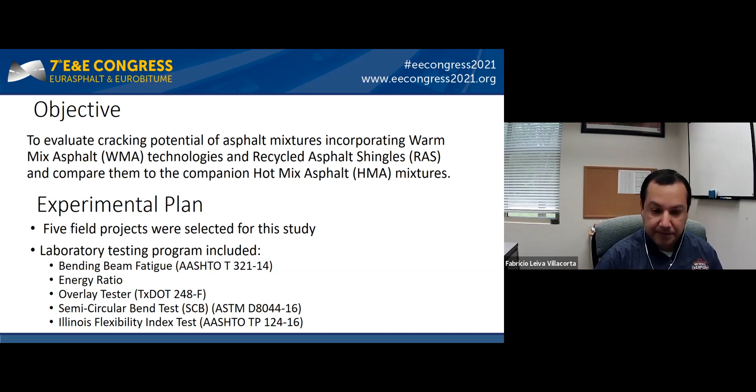Here I'm showing the 5 projects selected at different states: one in Wisconsin, the other in Alabama, Tennessee, North Carolina, and Indiana. We have a variety of technologies, 3 additive technologies and 2 foaming technologies. We also have a variety of virgin binders ranging from 58-28 all the way up to 67-22. We have different sources of aggregate and sizes ranging from 9.5 millimeter to 12.5 millimeter.

Pretty much all the mixes in the United States have RAP, reclaimed asphalt pavement. The minimum we had was 10%. With regards to asphalt shingles, those range from 2% all the way up to 5%, and those were the ones we were mostly interested in.

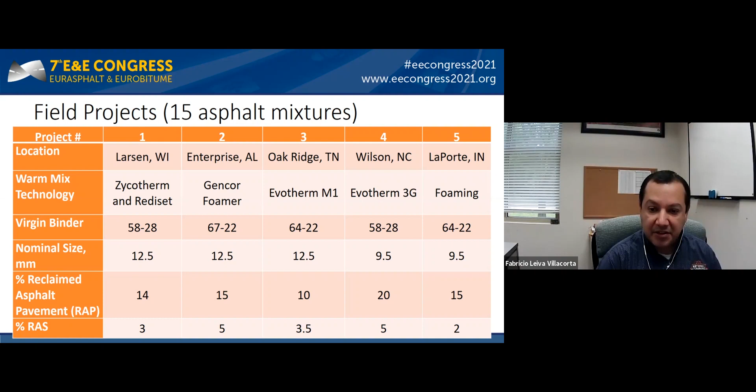I'm going to show you the majority of the results that were statistically significant, because what we were looking for in this study was for the warm mix technologies to perform similarly or better. Otherwise, we would be encountering negative effects, and that way we would have to start considering the use of the warm mix technologies in a different way. Fortunately, we were able to find that in most cases, for all these different tests we conducted, the majority of those were similarly or better.

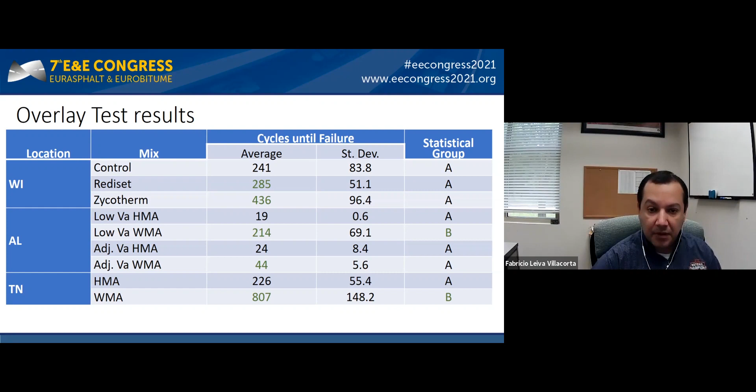For the other 2 projects, we found a couple of pairs where warm mix outperformed the hot mix, and in most cases that was the case. For some of them, the variability didn't show a significant difference, but in a couple of cases, as denoted by letters C and B on the grouping, we were able to find that those were indeed different.

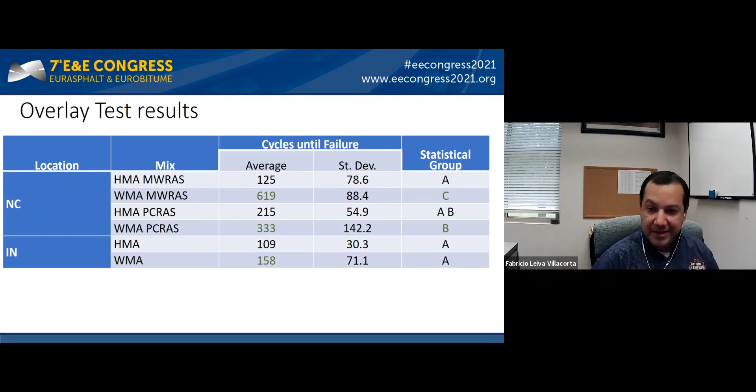Here I'll show you the summary of all the results, including the ones I didn't discuss before. The first one is the bending beam fatigue test. In that case, we didn't find any significant differences for any of the pairs we were comparing, warm mix versus hot mix technologies. For any of those, we were not able to find differences, which is okay.

I think as long as we didn't find anything negative or below the performance we were looking for compared to hot mix technologies, that was okay. We didn't have any preliminary criteria to compare with in that case. The next test was the energy ratio. There again we couldn't find any significant differences, and in that case we do have some preliminary criteria to compare. For most cases, all these warm mix technologies were able to be classified for medium to high traffic levels.

Again, to show the results I discussed previously for the overlay and flexibility index, those showed significant differences: 3 out of 10 pairs for the overlay, and 5 out of 8 pairs where warm mix technology outperformed the hot mix technologies. In the case of flexibility index, there was preliminary criteria, and all of them failed that criteria. However, we were expecting that, because those mixes had RAP and recycled asphalt shingles, so that was expected.

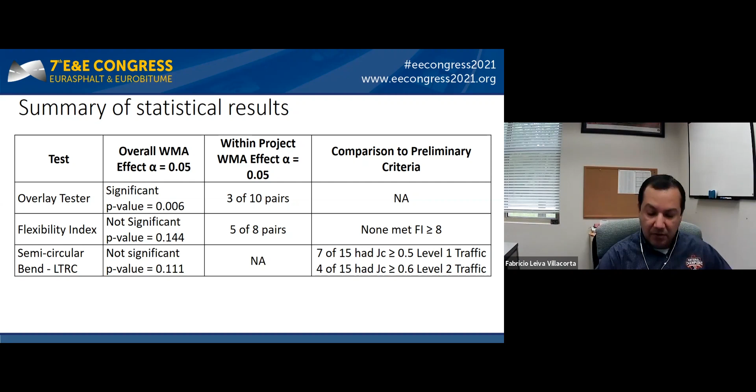So in conclusion, we were satisfied with the results. We didn't observe any detrimental effects on cracking resistance based on those 5 different tests we conducted. That was part of what we were looking for when we started this study, because the concern was that warm mix technologies were going to lower the temperature during production, and that may reduce activation of the asphalt that is part of the asphalt shingles. We were able to observe that was not the case.

In fact, we were able to observe that in most cases, warm mix technology helped increase cracking resistance, and that's promising in regards to these different materials, not only for RAP, which has been observed in the past in the literature. There are many different publications that already consider the combination of warm mix and RAP as a way to go in terms of performance. But now we were able to observe that this can also be the case when we add recycled asphalt shingles. And with that, that's all I have, thank you very much.

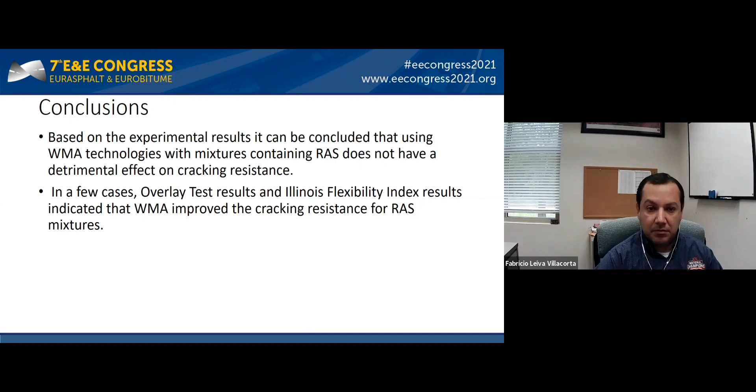The content of the paper is divided into two parts. Firstly, a brief summary about our experiences in the use of warm asphalt mixes in Argentina. And secondly, the latest development made in lab, combining warm mix technology with the use of different types and rates of RAP.

As background, I would like to comment that in the last Eurobitume Congress, the three parts of the paper presented there were about one RAP case study.

Regarding the experiences in Argentina, I would like to say as well that the warm mix technology was introduced in 2010, with more than 80,000 tons produced, laid and trucked on heavy traffic highways.

In our country, and following the latest trends, all the experiences so far had been with chemical additive or via chemical additivation, most of them associated with the use of PMB low temperature grades. Due to the increased availability of RAP from special asphalt mixtures, the RAP option is interesting for the future.

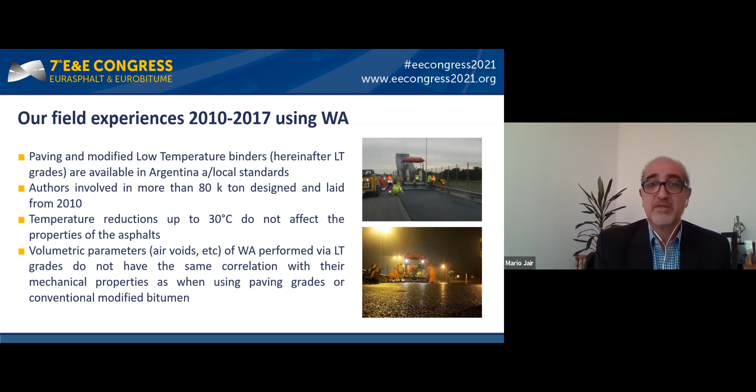Temperature reduction up to 30 Celsius doesn't affect the properties of the asphalts. And volumetric parameters such as air voids, etc., of warm asphalt performed via low temperature grades don't have the same correlation with their mechanical properties as when using paving grades or conventional modified bitumen.

Moving on to the RAP studied in the lab, these are the six RAP options designed for dense and two thin mixtures. The dense mixes add 25% of RAP from an old dense mix with PMB. The thin ones add 44% of RAP from an old stone mastic asphalt, also with PMB.

Four types of binders were used: a conventional CA30 bitumen, which is one viscosity grade according to the local standard in Argentina, and its low temperature version. And on the other hand, AM3, the most used PMB in Argentina, again in its low temperature grade.

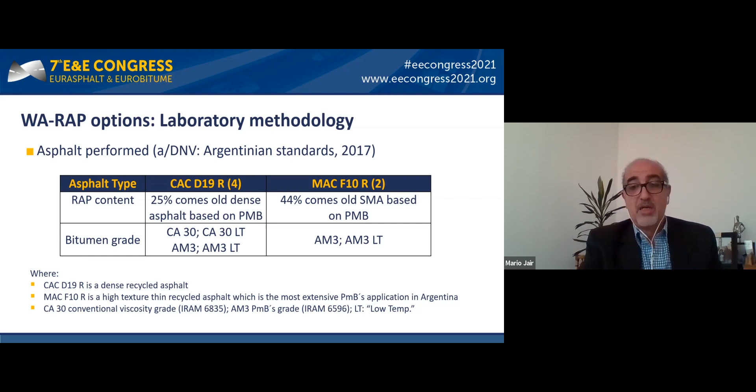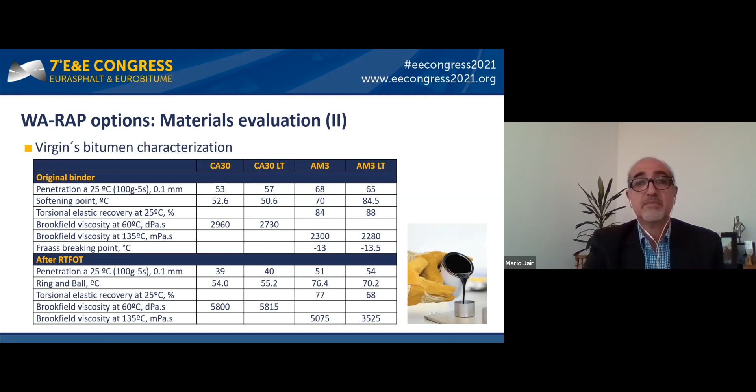Continuing with the evaluation of material, the characterization of virgin asphalt binders used for the test. The following are the gradation curves of the asphalt mix design.

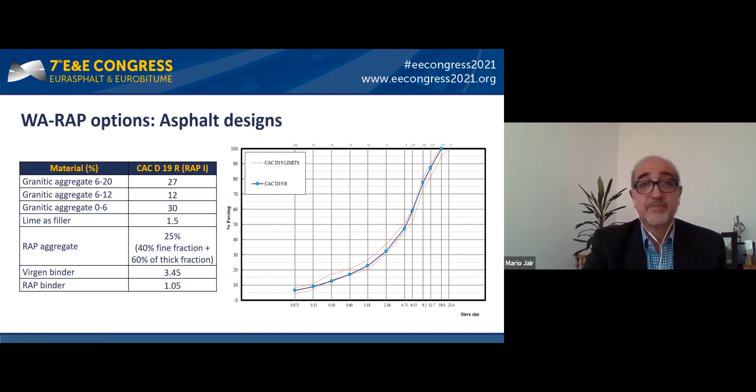Starting with the evaluation of the designed RAP options, we decided to observe the resistance to water, which was evaluated by means of the indirect tensile test. As can be seen, the retained resistance was greater than 80% in all cases.

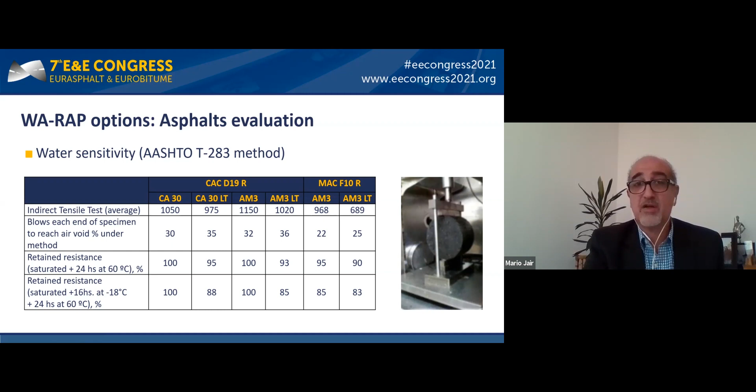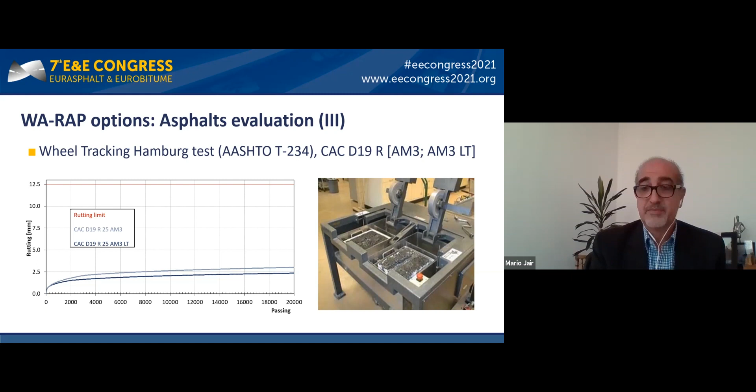The findings of the development of the RAP options evaluated in lab are as follows. We could see that temperature reduction up to 30 Celsius doesn't affect asphalt mechanical properties. Regarding water damage performance, the retained resistance was always greater than 80%.

In terms of the rutting performance, in all cases it improved due to the use of RAP in all asphalt evaluated, regardless of the type of bitumen used. No significant change in rutting behavior was observed for the use of low temperature binders.

With regard to Hamburg test performance, the use of low temperature grades showed greater deformation than those designed with conventional CA30 and AM3 grades. But in all cases, the deformation limit was not reached and no water damage was observed.

And again, the volumetric parameters, air voids, etc., in RAP performed via low temperature grades don't have the same correlation with their mechanical performance. So a better knowledge about low temperature binder effects should be considered, and a possible new approach considered as well about RAP design.

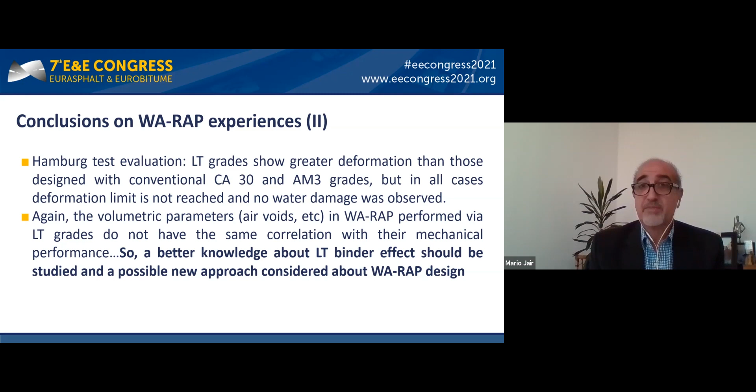And what is the future of this? It's clear that RAP is a promising option. In our opinion, asphalt standards or mix specifications should consider the type of warm technology used, and obviously the type of RAP used as well.

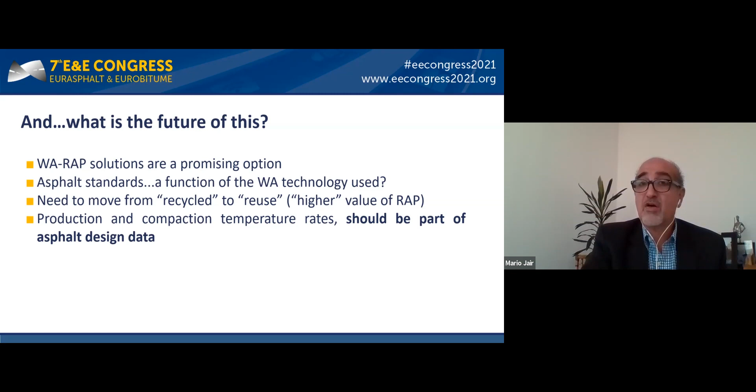We need to move from recycling to reuse due to the higher value of RAP when coming from special mixtures. Production and compaction temperature rates should be part of the asphalt mix design in all cases. And a scaled-up production of RAP will generate more information, which will allow adjustment in protocols and standards.

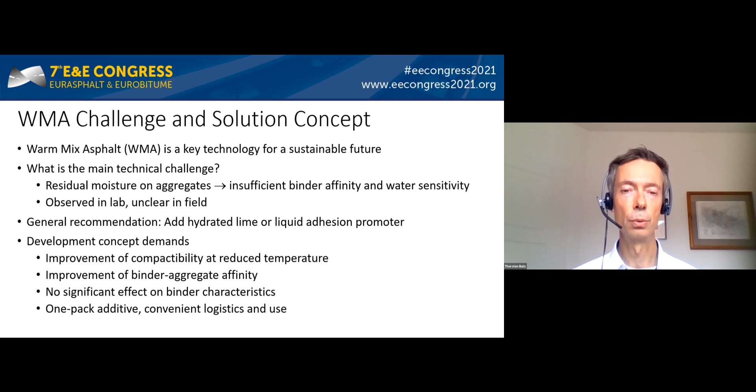Our development concept had to fulfill the following demands: improvement of compactability at lower temperature to allow warm mix, improvement of the binder aggregate affinity, and no significant effect on the binder characteristics such as stiffness and low temperature flexibility. It should be a one-pack additive, which is convenient for logistics and use.

Our final solution of this development work is a solid compound comprising Fischer-Tropsch wax, a petroleum-based component, and an affinity improving substance, which can be used as adhesion promoter.

Our concept was validated with the following test program: compaction at different reduced temperatures, laboratory simulation of Warmix asphalt production, and finally water sensitivity testing, applying dynamic indirect tensile test with and without water storage.

For the compaction tests, we selected the Marshall method and used stone mastic asphalt 8S according to German regulations. Three different mixes were produced: a hot mix reference using a standard polymer modified binder 25-55-55; the second was the same but included 1.5% of a standard Fischer-Tropsch additive, the well-known Sasobit; and the third, also the same mix but including 1.5% of the new combination additive.

Compaction was done at 145, 120, 100 and 60 degrees. The diagram shows that both additives equally reduced the compaction resistance and resulted in improved density. We can see that at 120 degrees, we obtained the same density as with the hot mix reference at 145 degrees. This means 25 degrees temperature reduction were possible without compromising compaction. We can also see that the new combination additive gave the best compaction at 100 degrees and below.

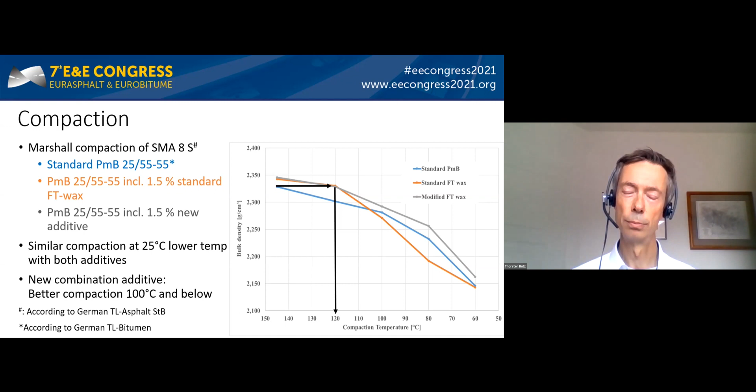Warmix asphalt production at reduced temperature may leave residual moisture on the aggregates. But how can this be simulated in the lab? Laboratories generally are working with completely dried aggregates to get the mass balances correct. Our solution was as follows.

The aggregates were dried, weighed, heated to 25 degrees lower temperature and were pre-mixed. Then 3% water were added. About half of the water evaporated and the rest was retained at the aggregate surfaces. Immediately after the water, the binder was added and the asphalt was mixed.

Again, an SMA 8S was used and it was compacted with a roller segment compactor. The reference hot mix was produced at 145 degrees, again with the polymer modified bitumen.

25/55-55 bitumen. The Warmix asphalt used the same binder but including 1.5% of the new additive and with water addition. This mix was compacted at 120 degrees, that means 25 degrees lower.

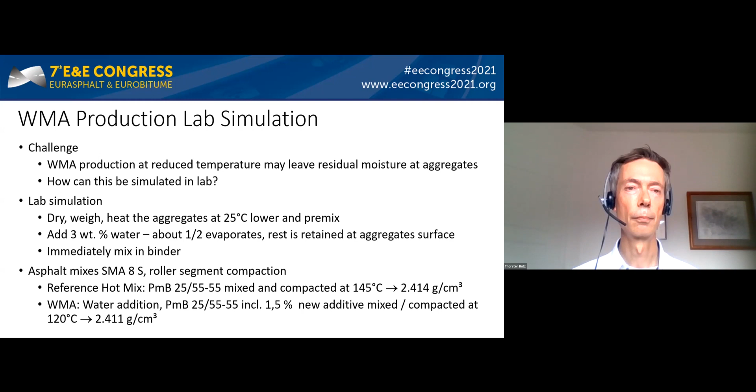For water sensitivity testing, 100 millimeter cores were drilled out of the compacted slabs. Half of the specimens were stored underwater for 72 hours at 40 degrees and reduced pressure.

Jumping to the water stored samples, we see quite similar results: equal fatigue functions with slight benefits for the Warmix. This result shows that it is possible to produce Warmix asphalt without compromising the water sensitivity.

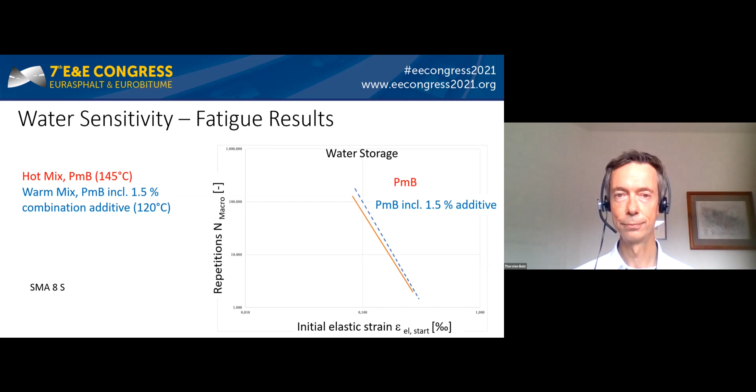Finally, my summary and conclusions. A Warmix additive with binder aggregate affinity improvement was designed, which addresses the residual moisture challenge. It allows similar compaction at 25 degrees lower temperatures. The fatigue performance of the asphalt was slightly better compared to the reference hot mix asphalt.

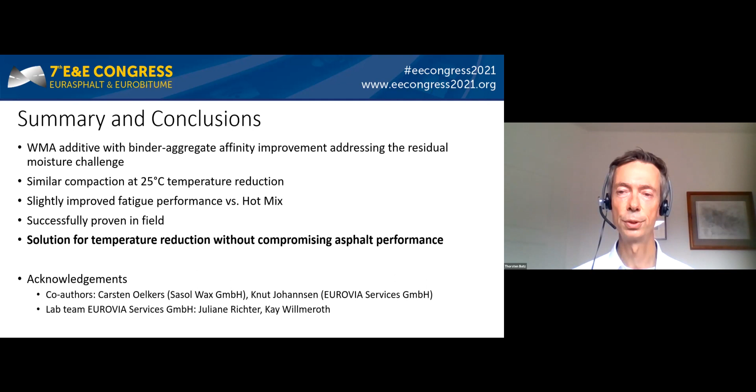Meanwhile, this concept was successfully proven in field tests. So in summary, a solution for temperature reduction without compromising asphalt performance was developed. Thank you very much for your attention.

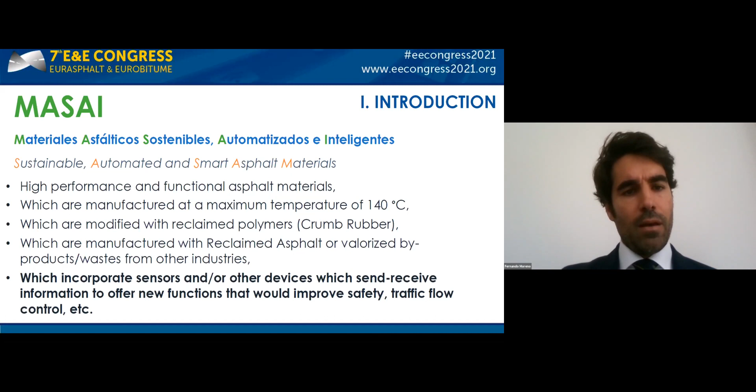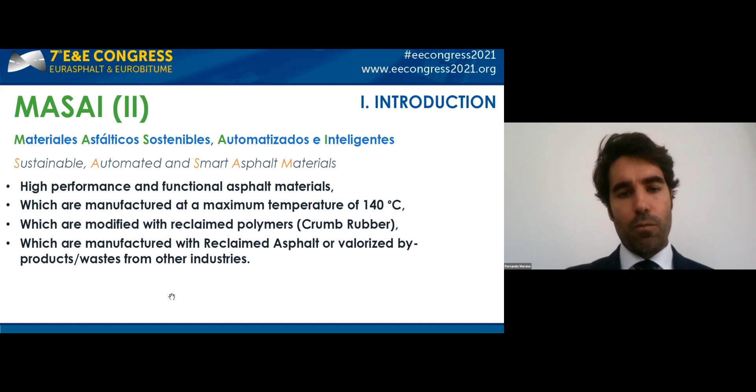Based on the needs that MASAI will meet, we can obtain different grades of MASAI. The first 2 conditions are mandatory, and if the MASAI meets a third one, we consider it MASAI grade 1. If in addition this MASAI incorporates sensors and other devices that make it automated or smart, we consider it MASAI grade 1+. If the material meets 4 material conditions, we consider it MASAI grade 2, and if it meets 5 conditions, including the sensors and other devices that make it automated or smart, we consider it MASAI grade 2+.

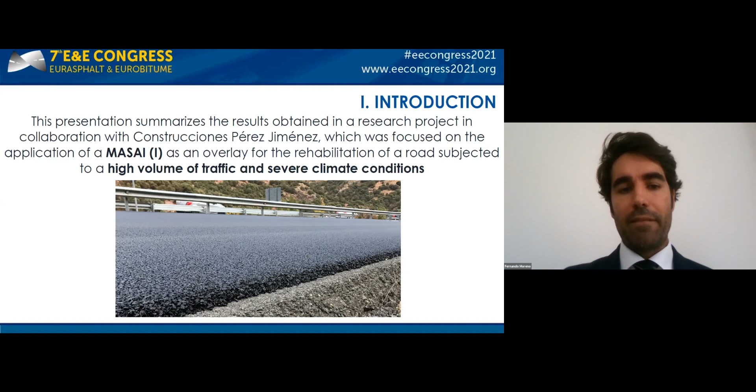This presentation summarizes the results obtained in a research project in collaboration with Construcciones Pérez Jiménez, focused on the application of a Masai Grade 1 as an overlay for the rehabilitation of a road subjected to a high volume of traffic and severe climate conditions.

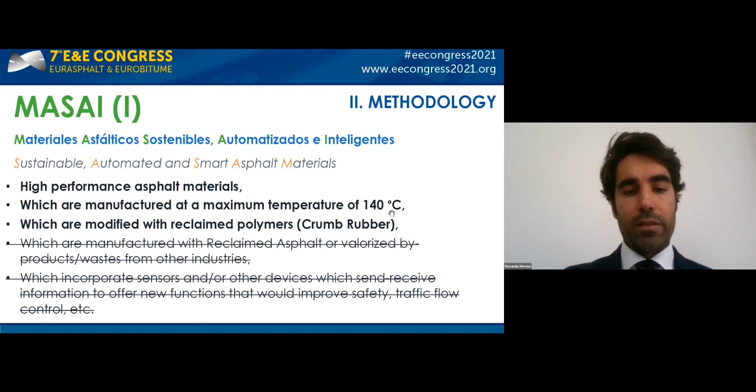The Masai Grade 1 used was a high-performance asphalt material manufactured at a maximum temperature of 140 degrees and with a crumb rubber modified asphalt bitumen.

During the design of this material, different rheological tests using DSR were performed to assess the mechanical performance of the crumb rubber modified bitumen used for the manufacture of the mixture in comparison to a traditional polymer modified binder.

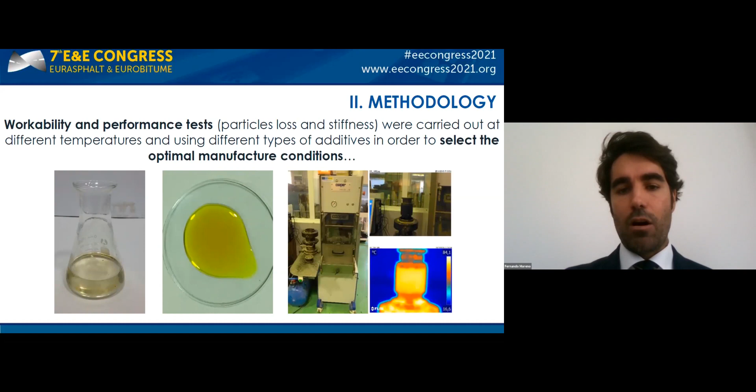Workability and performance tests were carried out at different temperatures and using different types of additive in order to select the optimal manufacture condition. After that, different tests were used for the asphalt mixture design and quality control.

The Masai Grade 1 was used for a rehabilitation action on the A-92 highway in South Spain, where it must withstand extreme climate conditions and high traffic volume.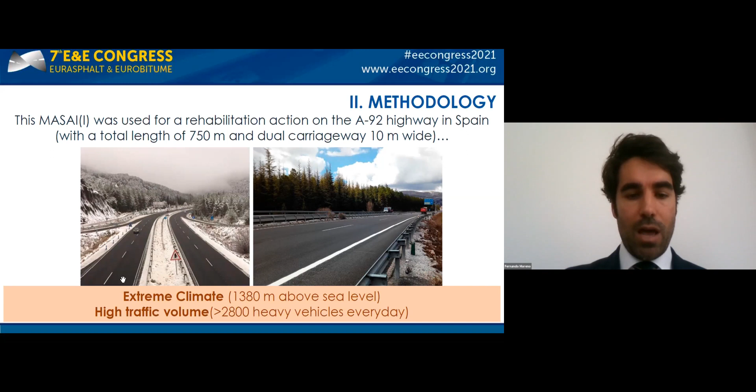In addition, the conditions during construction were very adverse because this material was applied after long hauling distances, in a thin layer, and during night works at low temperature.

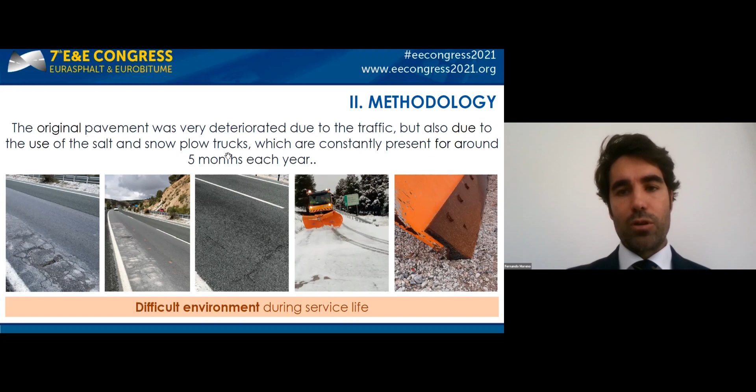It also must withstand a difficult environment during the service life, because the original pavement was very deteriorated due to traffic, and because during its service life it will be in constant presence of around 5 months each year of salts and other de-icing agents and the passage of snowplow trucks. So we can say that this material will be tried in the best trial condition because it was the most exigent.

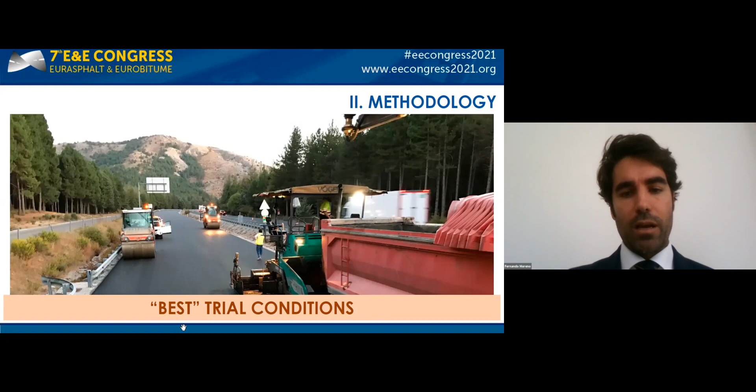After the construction of the trial section, we made an exhaustive control during manufacture, laying, and compaction that includes thermal control, mixture control, emission control, and layer control.

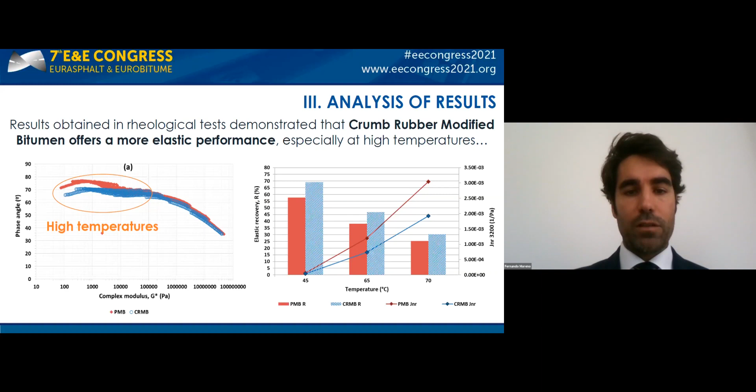Results obtained in the rheological test demonstrated that the crumb rubber modified bitumen offers a more elastic performance, especially at high temperature. Workability tests demonstrated that it was possible to reduce the manufacture temperature by 25-30 degrees without having an impact on the mechanical performance of the material.

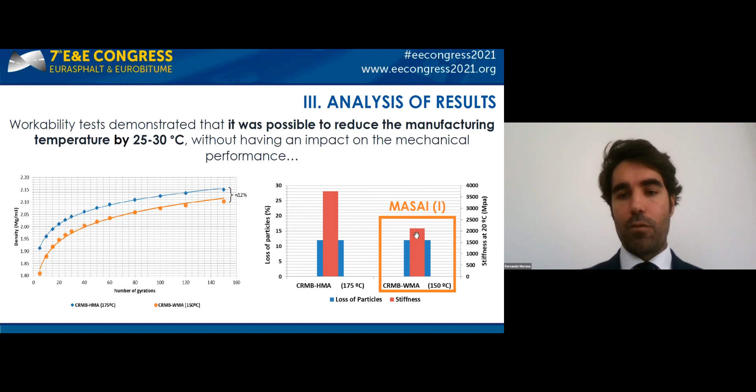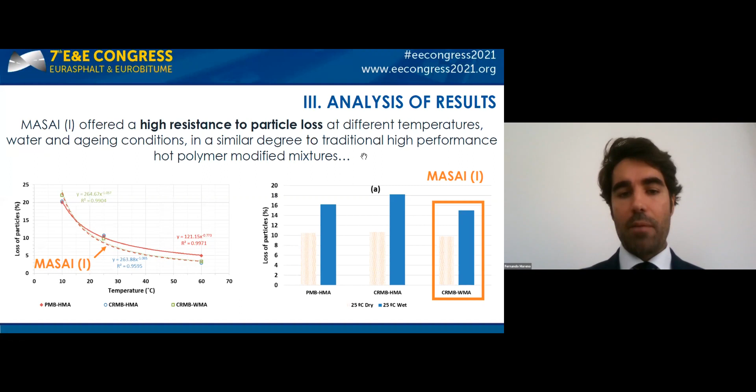The MASAI Grade 1 design offered a high resistance to plastic deformation and a lower water sensitivity, as well as a high resistance to particle loss in a similar degree to traditional high-performance hot polymer modified mixtures.

On the contrary, they offer a slightly lower stiffness than traditional high-performance hot polymer modified mixture, but a higher resistance to low temperature and fatigue cracking.

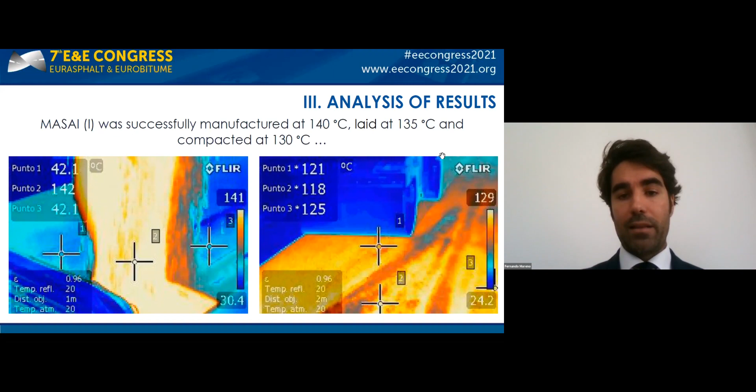MASAI Grade 1 tested was successfully manufactured at 140 degrees, laid at 135, and compacted at 130 degrees. A reduction of around 20% in fuel consumption was observed, and contaminant emissions were also reduced, ranging from 20% to 50%.

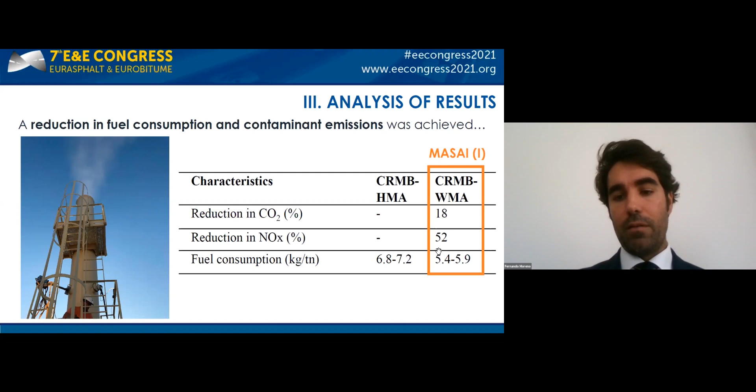The quality control corroborates the good performance of the Masai, especially in terms of long-term performance under fatigue cracking test. After 4 years, it is performing perfectly in spite of the deteriorated subjacent layer, the hard winter, and the high traffic volume that it must withstand.

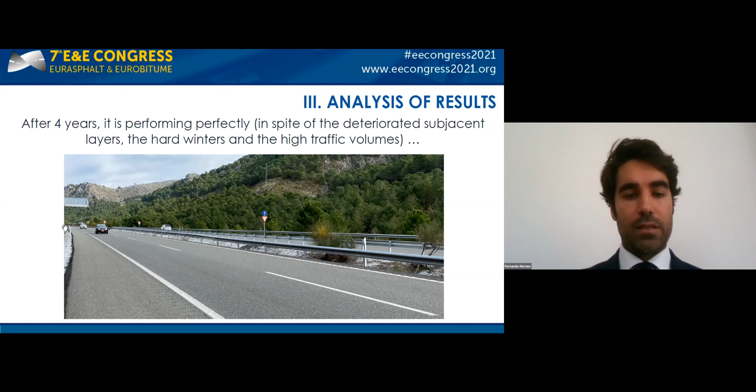As conclusion, we can say that the laboratory design of the mixture revealed that Masai Grade 1 led to a mechanical performance comparable to that recorded for traditional high-performance hot mixtures, despite being manufactured with crumb rubber modified bitumen at 30 degrees lower than the hot conventional mixture.

The study of reproducibility in plant demonstrated that Masai Grade 1 can be manufactured in a conventional asphalt plant and spread with conventional equipment. In addition, the cost overrun associated with the use of additives for lowering the temperature can be partially compensated by the reduced energy consumption in plant.

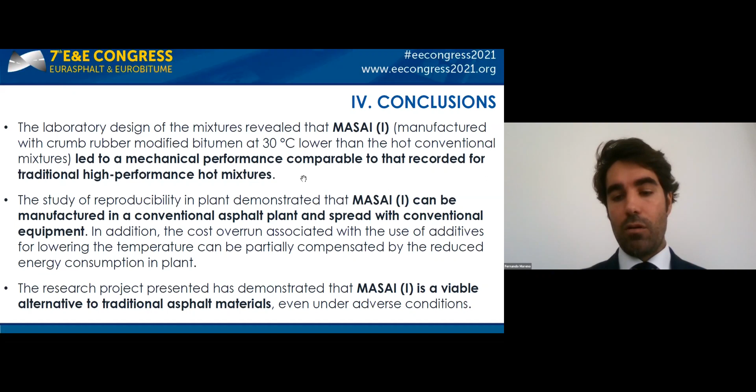The research project presented has demonstrated that Masai Grade 1 is a viable alternative to traditional asphalt material under the most demanding conditions. Thank you very much for your attention.

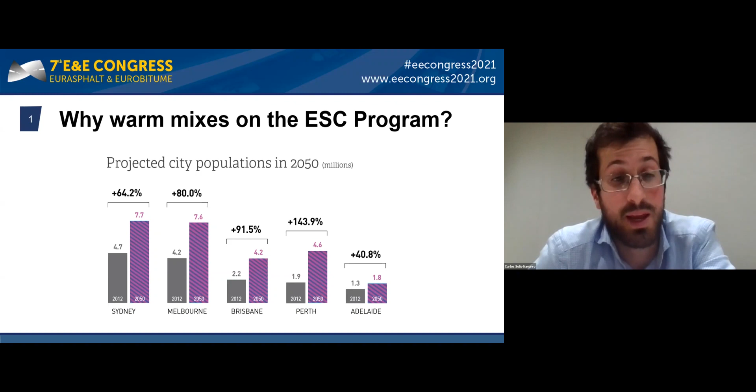The Easing Sydney's Congestion program is one of the responses of the government for the increasing demand of infrastructure. The population in Australia and in Sydney is expected to double in the next 20 to 30 years, so that drives the demand of infrastructure.

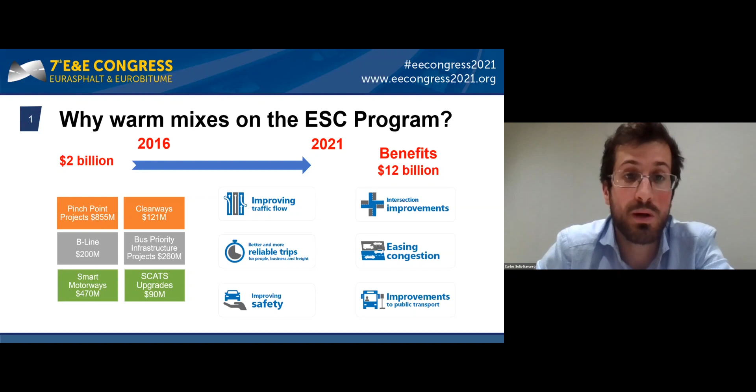The program started in 2016 and is still ongoing. The main goal was to squeeze the capacity of the network by improving existing intersections or building new bus lanes, improving corridors. All of this work is to be undertaken in an urban and already constrained environment.

So we were seeking low impact, cost-effective solutions. Low impact meaning solutions that were disrupting as minimum as possible to the road users. Within this context, we identified that Warmixes could contribute to this goal.

Warmixes enable us to build quicker, therefore gaining some productivity efficiencies, as for example during a night shift we are able to lay 3 layers of asphalt rather than 2. But we also get environmental benefits as a result of reducing the energy required to produce the asphalt mixes. All of this leads to a reduction in cost, first from the energy consumption side, and also, for example, in a reduction in traffic management, which is a significant cost at the end of the day for these projects.

Having this methodology in mind, we adopted it for a number of projects. This shows an example of the solution: we have a widening, and then also we have some treatment within the existing carriageway.

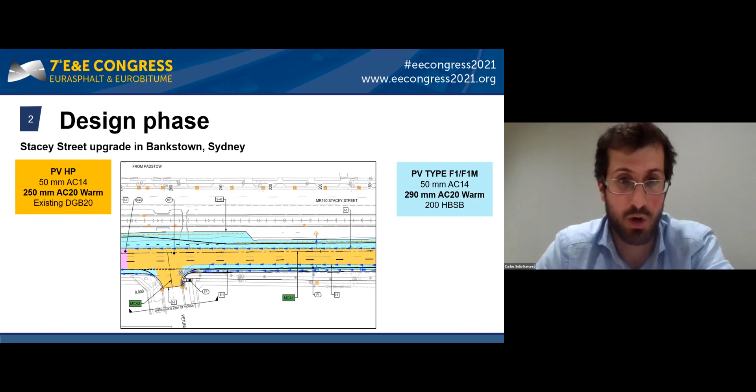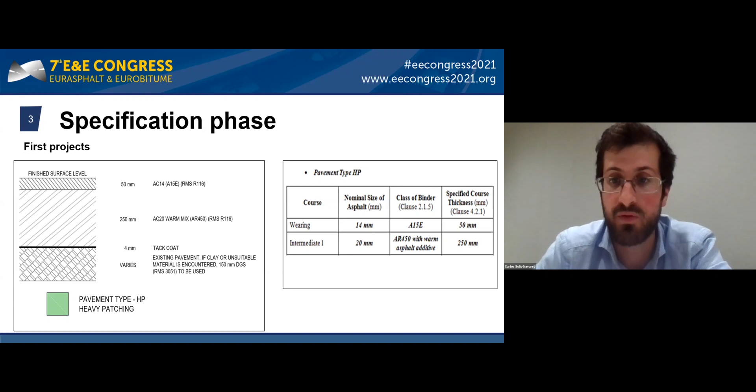At the beginning of the program, we thought that just adding the word Warmix to the right of the type of mix, AC20, was sufficient, and just adding the requirement for Warmix in the specification. It was quite promising, as we were receiving the constituent material report with the Warmix additive in it.

However, when we were reviewing the laboratory test reports, we could identify that the compaction temperature of the asphalt mixes was still 150, similar to a hot mix. Therefore, there was a lack of communication or understanding from the contractor and supplier about the intent and use of the Warmix.

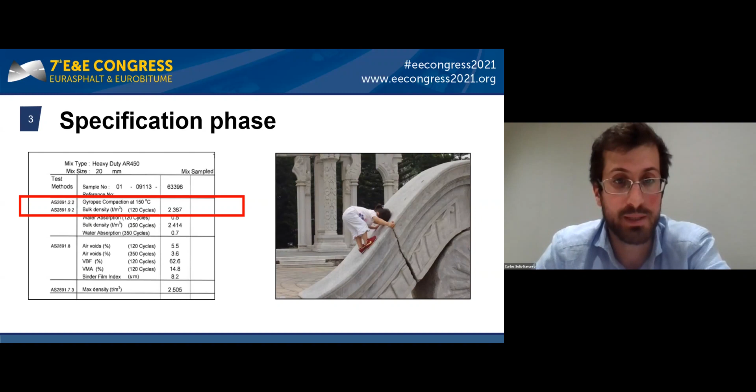In order to calculate an equivalent compaction temperature, the Warmix compaction temperature is required to undertake some testing and reporting in accordance with an Australian standard. This is in the case of Australia. The goal here is to get a temperature that will deliver the same performance as the hot mix.

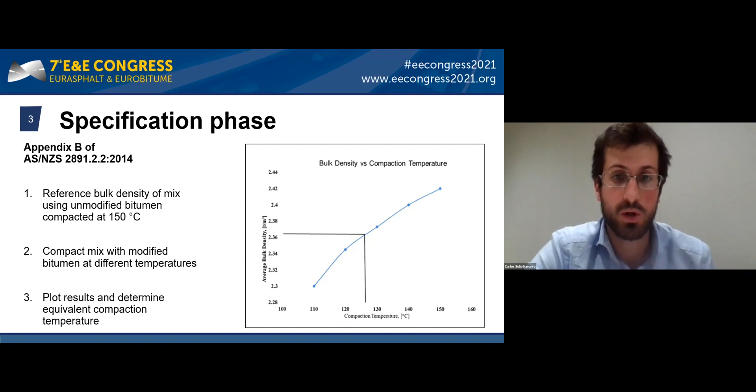For this project, where we were not able to get these temperatures, we liaised with the supplier and the contractor, and we undertook all this homework before the delivery date.

However, when the project started to go on site, I witnessed that the temperatures on site were still hot, as a hot mix. They were using the Warmix additive, but still manufacturing at hot mix temperatures. Investigating this problem a little bit, there was a lack of communication in this case between the contractor and the supplier plant.

Having this in mind, we decided that additional information was needed in our documentation, specification, and drawings. So we started to add all this testing required into the specification.

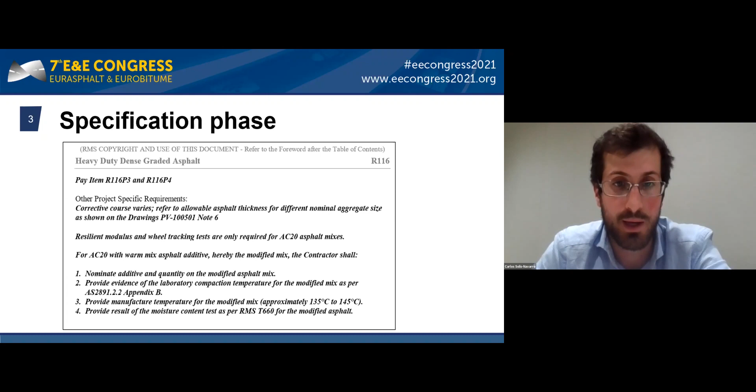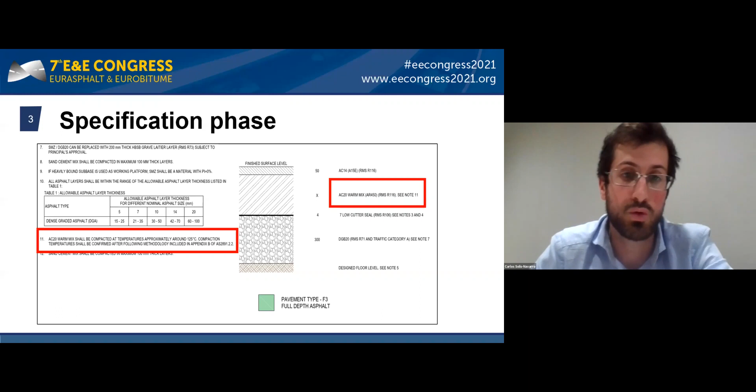Additionally, on the drawings, we added a note letting the contractor know that the temperatures have to be lower, and they need to follow this methodology to calculate the warm mix temperature.

Doing this gradually, little by little, we ended up having more projects with manufacture and compaction temperatures lower than standard, around 20 to 30 degrees less than a hot mix. What is more important, the performance was similar to a hot mix and conforming to the specification. That for us was the beginning of a new era and a great milestone, a great achievement for the Easing Sydney's Congestion program.

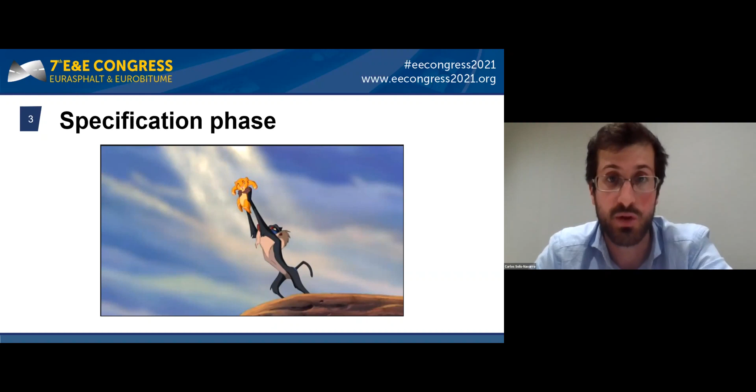A little bit of data from site: we undertook a trial with hot mix and warm mix at the same section with the same condition, and we had similar results in terms of compaction and relative compaction and densities. So all of that was as expected.

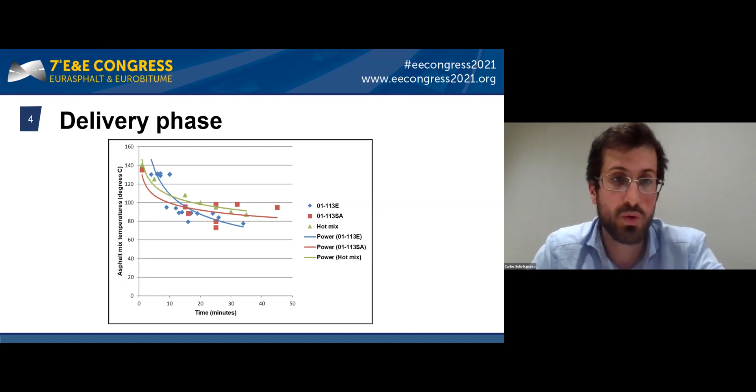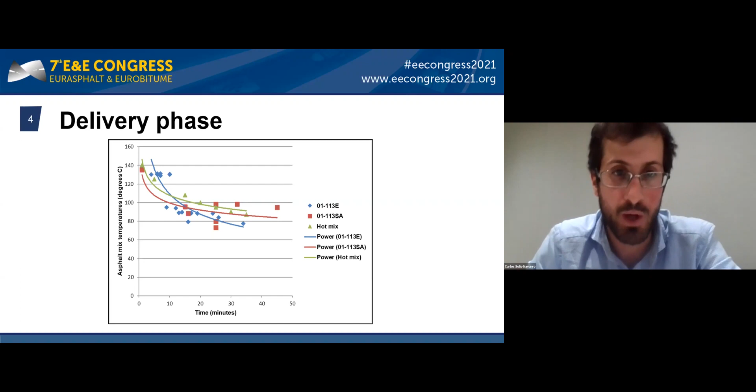We also tried to test, not to track the cooling rate of the hot mixes and warm mixes, but the methodology used had some limitations, and we were using just a probe to check the temperature at the top of the surface. Moving forward, in Easing Sydney's Congestion, we have 3 goals.

First, to be able to report program efficiency savings in order to provide more comfort to the suppliers so they can understand the gains from the warm mix. Similar work has been done in the UK, where they were reporting program savings of 20%.

We are also trying to report carbon footprint savings, similar to work that is being undertaken or has already been undertaken in Spain. At the moment, we are also trialing the use of warm mix with polymer modified binders. The gains will be more associated with the environmental side and the program savings, as the thickness is just 50 mil thick.

The main takeaway of this presentation is that collaboration and willingness of all parties involved are key elements for the implementation of this technology. The ESC is just a small example of what can be achieved if the right mindset is embraced. Let's work all together, road agencies, contractors, consultants, suppliers, because a shift to a more sustainable pavement industry is possible.

I would like to close this presentation by acknowledging the contribution of Luis Alberto Solís, a true legend of the pavement industry and my inspiration as a father. Thanks for listening.

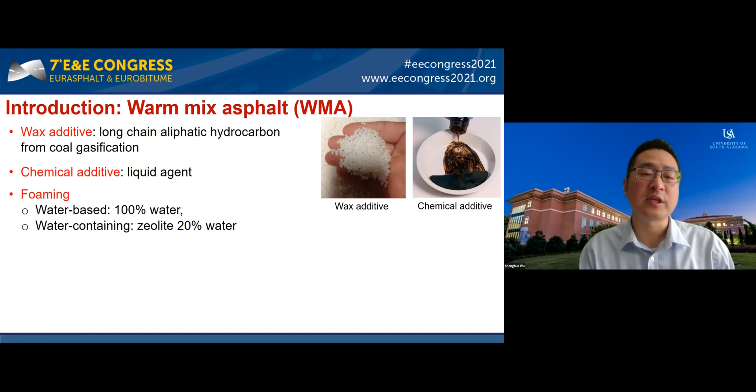The second major one is chemical additives. It has many brands, many patents available on the market, and it is a liquid agent. The third one is the foaming technology, which includes the water-based method. When you mix 100% water with the asphalt at a very high temperature, the water becomes steam, which increases the volume of the asphalt. In that case, we can reduce the viscosity of the asphalt binders.

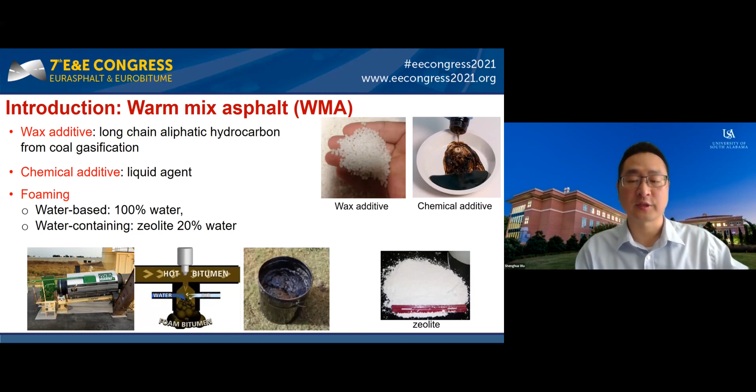The second type of foaming technology is the water-containing type, which uses zeolites. It contains 20% water, so when the zeolites are mixed with the hot asphalt, it can also release water into the asphalt mixture to reduce the viscosity. As you can see, we have so many different types of Warmix asphalt technology, and there are many benefits provided by Warmix asphalt.

As we can see in the photo here, it demonstrates that Warmix asphalt technology provides a much better working environment for field workers. As you also know, Warmix initially came from Europe and is getting very popular in the US.

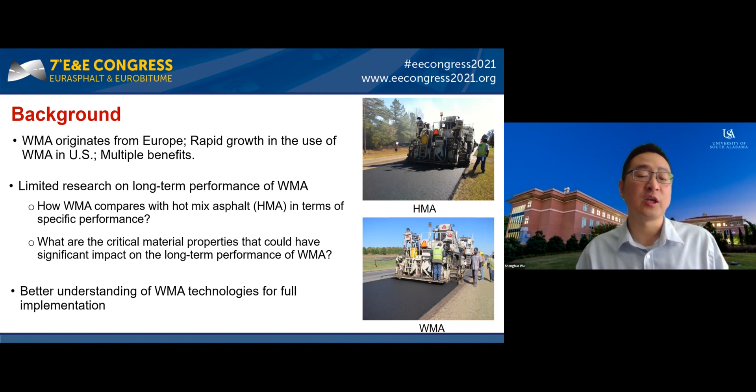Our concerns about the long-term performance of Warm Mix Asphalt are that we are not sure about what's going to be going on after 10 years of the Warmix in the field. So that's going to be the objective of this research. We want to compare HMA with the Warmix. Looking at long-term performance, we also want to know what are the critical material properties that could have significant impacts on the long-term performance of Warmix. This is going to provide us a much better understanding of the Warmix technology before we confidently and fully use it.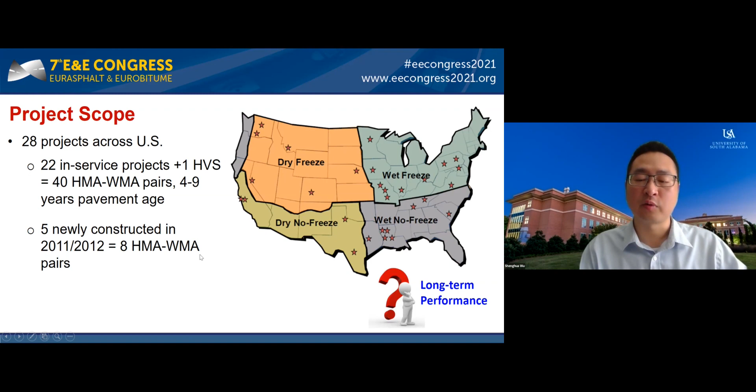Overall, we are looking at 28 field projects across the US. As we know, the US has 4 major climate zones, including dry freeze, wet freeze, dry non-freeze, and wet non-freeze. We have 22 in-service projects and 1 heavy vehicle simulator in California. Totally we have 40 HMA and WMA pairs, ranging from 4 to 9 years pavement age. We also have 5 newly constructed pavement sections, including 8 HMA and WMA pairs.

Based on those field projects, we monitor performance. I want to discuss the major distresses in terms of transverse cracking. For transverse cracking, we find that there is both reflection cracking and surface-initiated cracking, indicating that transverse cracking is not only thermal cracking related, but also maybe a reflection. Another major type of distress we find is wheel path longitudinal cracking.

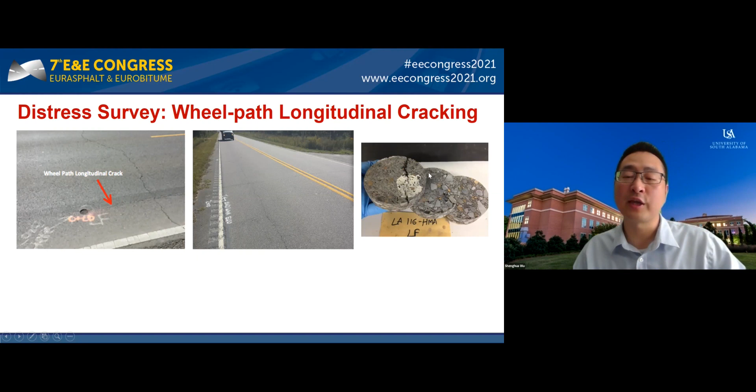We also take the field core at the tip of the crack. We slice the core into different layers, and we can see that the crack is starting from the top and propagating downward. This is indicating that wheel path longitudinal cracking are all top-down fatigue cracks.

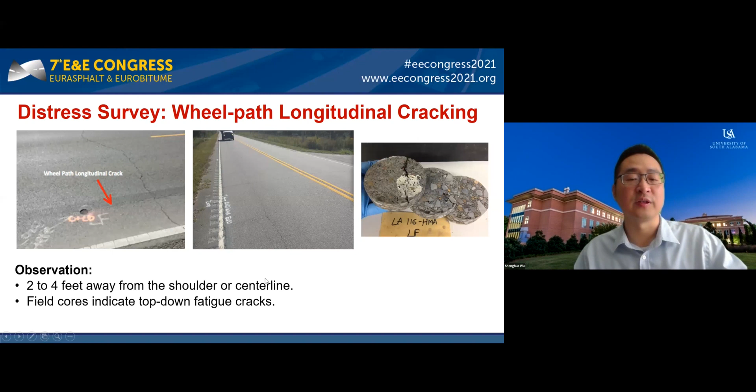The third major distress we find is rutting depth, but we find that the rutting depth is very low for both WMA and HMA pavements.

Besides the distress survey, we also collect a lot of field cores for each pavement section. We do the binder extraction. We also do a lot of testing on the bitumen in terms of PG grading, G-star over sine delta, etc.

For the asphalt mixture cores, we run the IDT modulus. We also run the IDT fracture testing at room temperature and low temperature, one at 20 Celsius degrees, one at negative 10 Celsius degrees. We also did a Hamburg wheel tracking device test on the field cores, and Hamburg wheel tracking testing can also provide us moisture damage resistance of the asphalt mixture.

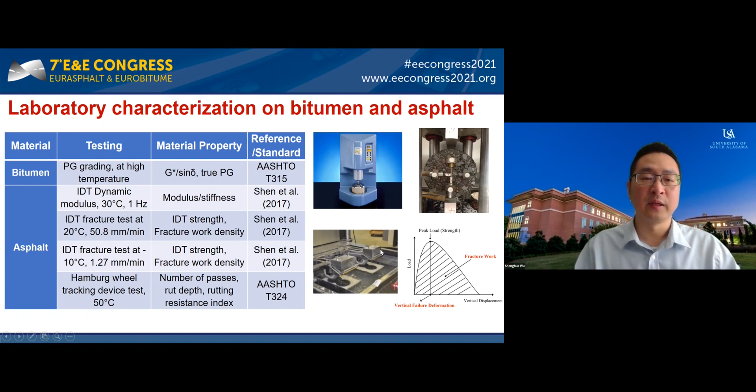Based on the field data, I want to present the results and findings in terms of the comparison between WMA and HMA. The first one is about the bitumen properties. We are using the PG increase, which is calculated by the extracted binder PG minus the original binder PG.

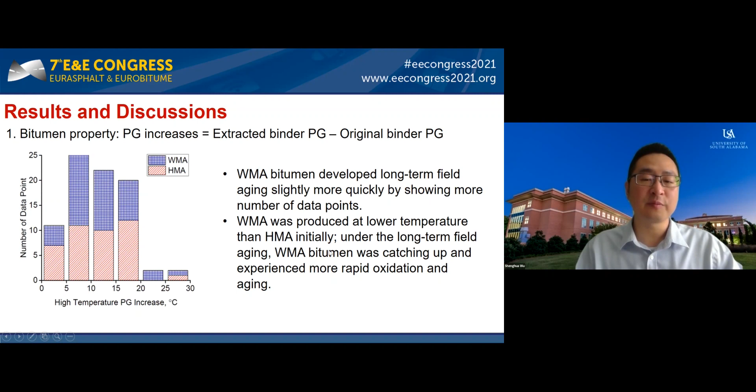In this figure, the WMA is shown in blue, the HMA in red. WMA bitumen developed long-term field aging slightly more quickly, showing more data points. We also found that WMA was produced at a lower temperature than HMA initially. Under long-term field aging, WMA bitumen was catching up and experienced more rapid oxidation and aging.

Next, we focus on the asphalt mixture properties comparison between HMA and WMA. This figure shows the number of WMA and HMA pairs with respect to percent differences in dynamic modulus. You can see that the majority of WMA and HMA are pretty much comparable in terms of stiffness.

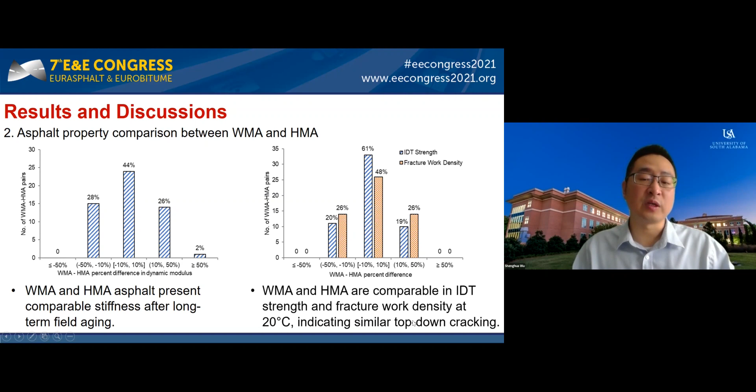The second figure shows the IDT strength and fracture work density comparison for HMA and WMA. We can see the majority have very similar material properties here, indicating HMA and WMA show similar top-down cracking resistance.

In terms of low temperature cracking resistance, we are using the IDT fracture work density comparison as well as the IDT strength. What you can see here is that in the majority, within plus or minus 10% comparison, WMA has comparable and better thermal cracking resistance than HMA.

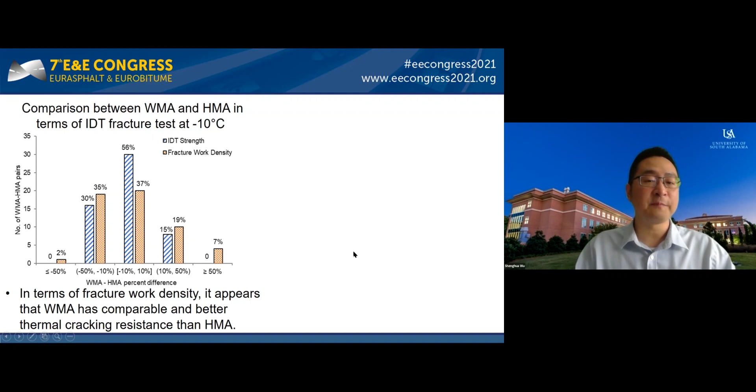The last one is about Hamburg wheel tracking testing. We are using the rutting resistance index. What we can see is that the majority of WMA and HMA are showing very comparable rutting resistance.

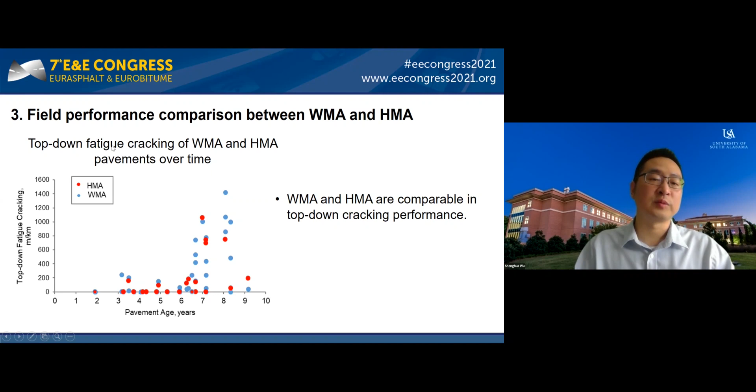In terms of field performance, as we can see for top-down fatigue cracking, with more aging you're going to see more cracks. Comparing WMA and HMA in terms of top-down fatigue cracking, they are showing very comparable performance.

For the transverse cracking comparison, we can also see that with longer pavement aging time, we're going to see more cracking. And we're going to see the HMA and WMA showing very comparable transverse cracking resistance. For some of the projects, they are showing early age transverse cracking, most likely due to the low temperature.

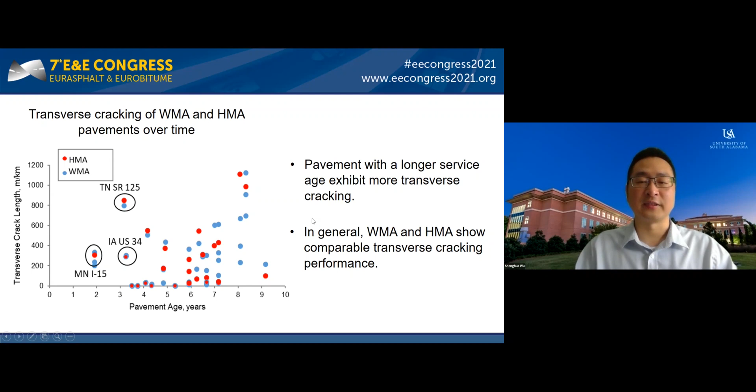Based on our findings, I want to recap what we found for this project. From the material property point of view, after long-term aging, both asphalt and bitumen in WMA and HMA have been aged. They are showing very comparable stiffness, IDT strength, and fracture work, low temperature cracking resistance, as well as rutting resistance.

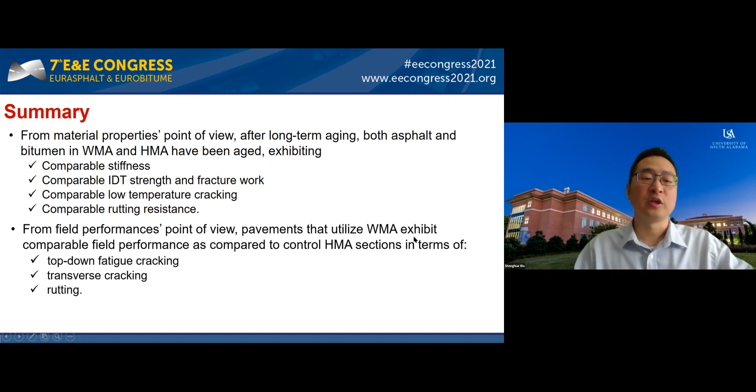From the field performance point of view, pavements using WMA show very comparable field performance compared to the control HMA section in terms of top-down fatigue cracking, transverse cracking, as well as rutting. Based on our findings, we found that WMA can be confidently used to achieve the same long-term performance, as long as the mix design is followed in a similar manner as the HMA design.